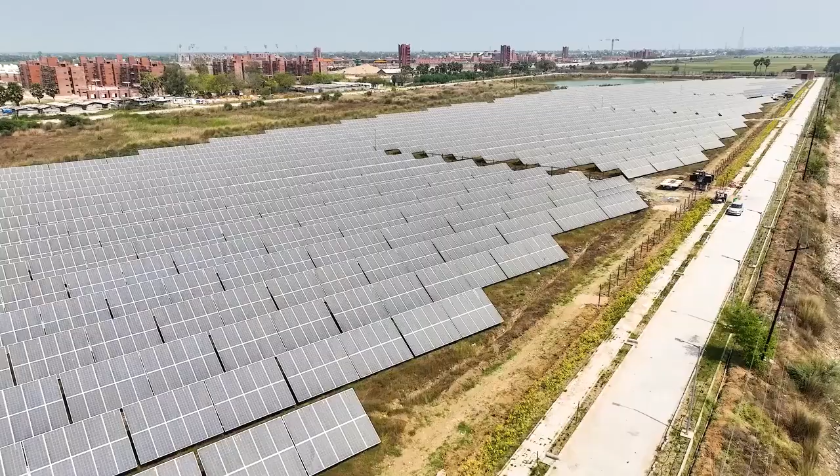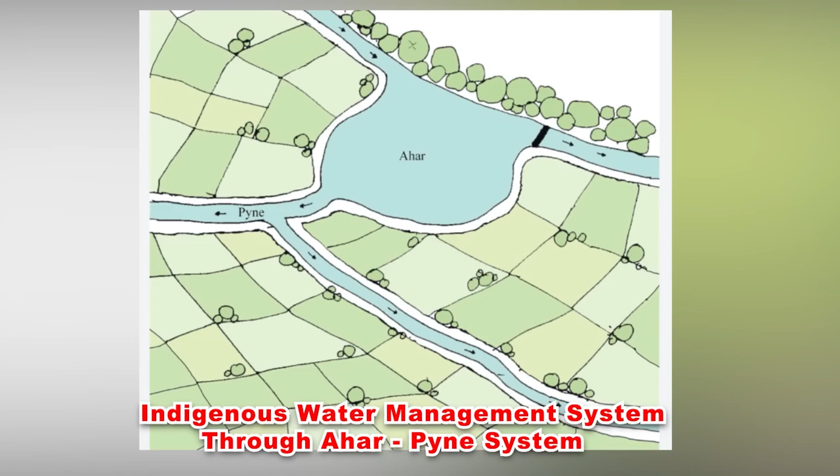The Nalanda University campus is probably the world's largest net zero sustainable green campus. The key sustainability features for developing this net zero campus include net zero energy, net zero water, net zero waste and net zero emission. This hybrid concept, featuring renewable energy sources with the indigenous approach in its integration with various innovative technologies, shall undoubtedly exemplify rational approaches to construction of other upcoming projects, campuses and community construction models in future.

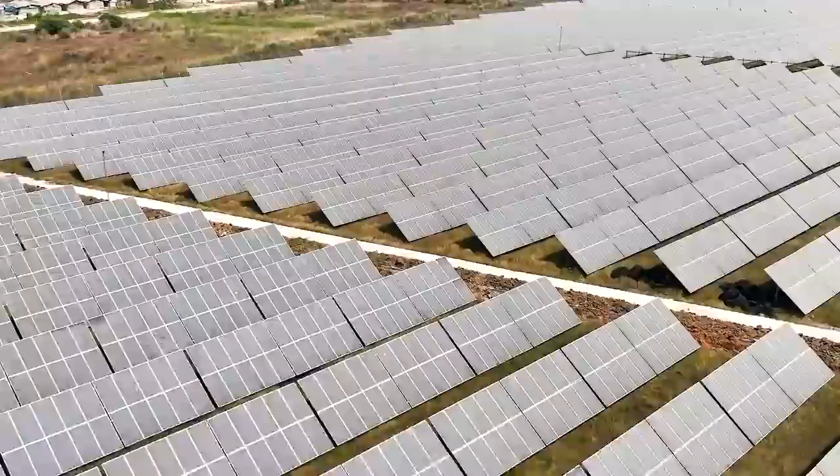The campus combines state-of-the-art technologies with planning principles of the ancient Nalanda University to create a carbon-neutral and zero-waste campus. Some of the most important and indigenous aspects and palette of concepts for passive methods operating at different scales are 6.5 MW solar PV captive power plant, 1.2 MW biogas plant, desiccant evaporative technology for cooling, heating of the buildings,

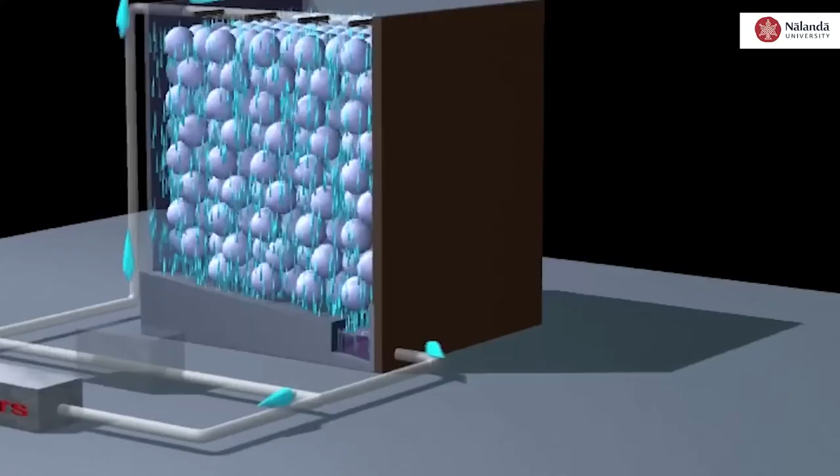solar integrated thermal storage technology for HVAC system, use of compressed stabilized earth blocks instead of common burnt clay bricks, thick cavity walls to increase thermal resistance, climate appropriate landscape design to reduce potable water demand, decentralized water treatment systems, cooling as well as cleaning of the air through use of selected native plants, building management system, etc.

The main entry gate symbolizes the university as the temple of knowledge acquisition and a seat of higher learning. The first gate along the main road is the first threshold, marking the entry to the campus. The next grand entry gate, 7.5 meters wide, forms the neck, screening people and vehicles in. The large, curved volume creates a sense of pause and calm as felt in the temple entrances.

The academic spine is spanning in the north-south direction of the campus. It houses around 40 various capacity classrooms with a total capacity of 1890 students varying from 25 to 300-seater classrooms, an examination center, international relations office, placement cell, meeting or discussion rooms of various sizes and other common facilities like faculty offices, laboratories, 100-seater mini auditorium, etc.

In the southern side of the spine, the Grand Sushma Swaraj Auditorium is situated, followed by two guest houses, namely, Campus Inn and International Center. The academic spine is grand, welcomed by a huge semicircular catenary.

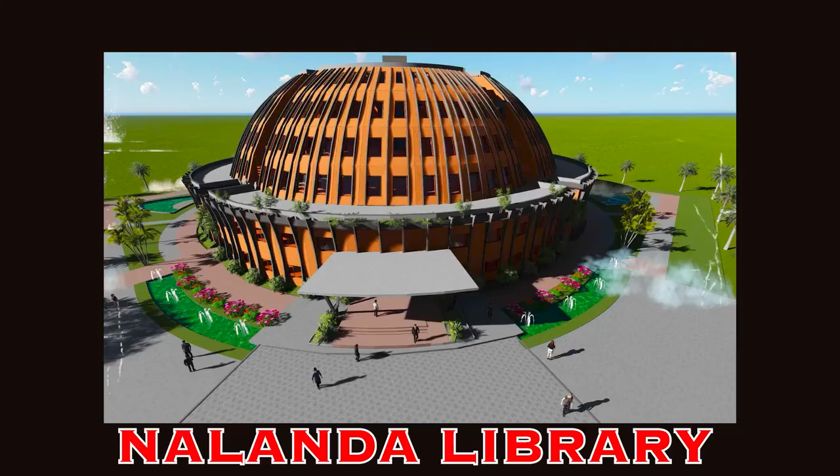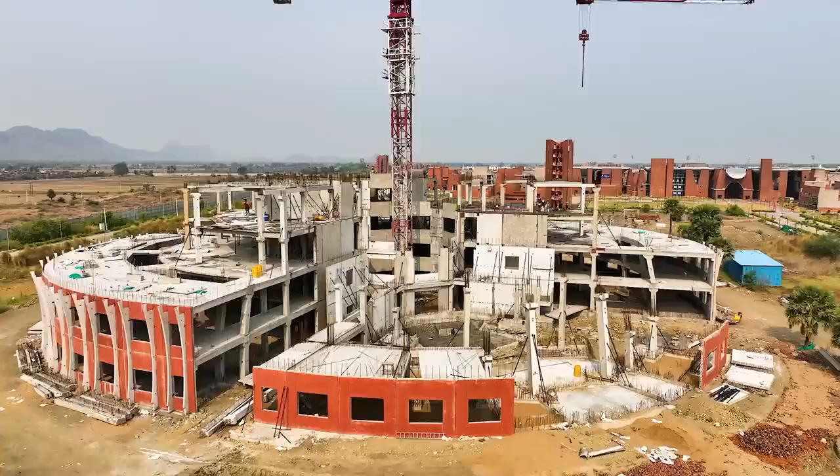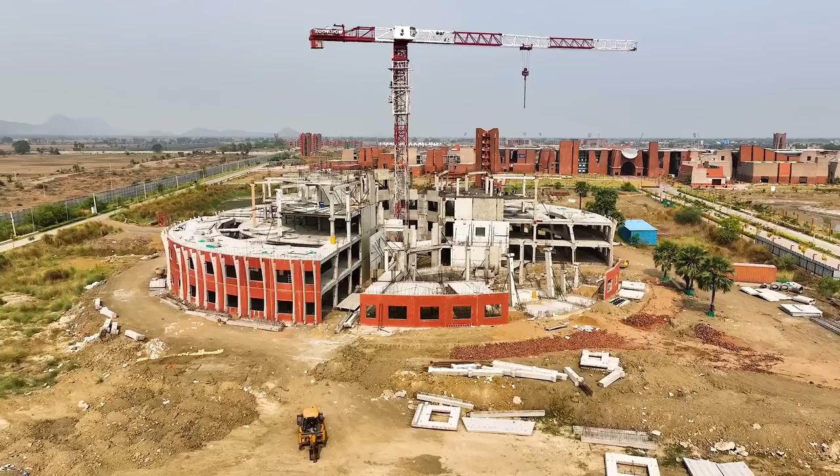The Nalanda Central Library building is envisioned to provide state-of-the-art facilities for study and multidimensional development of intellect and a locus for collaboration. The building has a built-up area of 17,545 square meters. With more than 3 lakh books volume and over 3,000 user capacity, the huge Nalanda Library building is being built in ground plus 5 floors.

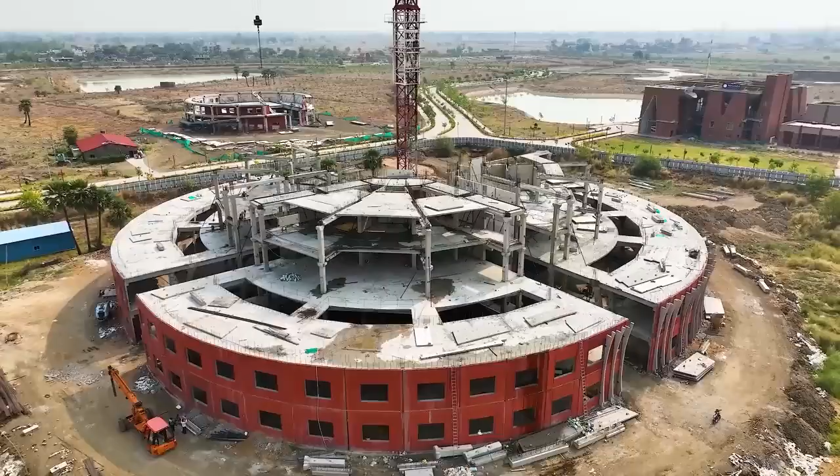The building is shaped as a spherical stupa divided in 4 quadrants with an outer radius of 81 meters at base and height of the building at crown is 26 meters, which makes it probably the biggest dome in the world. The works for construction of this building are in full swing.

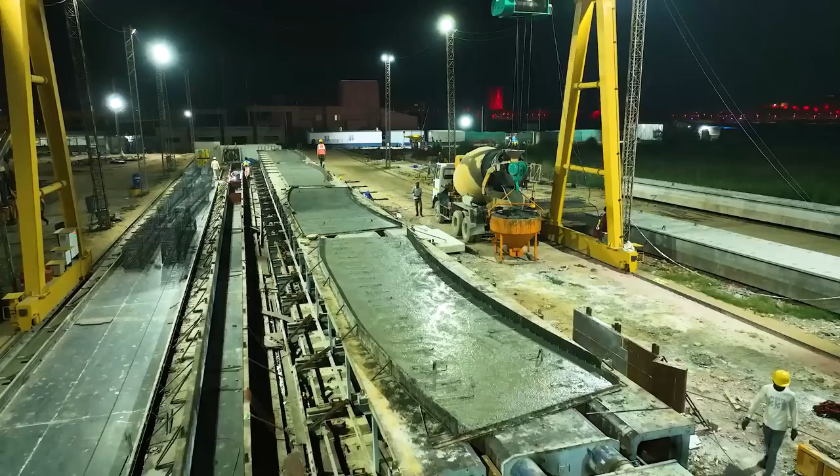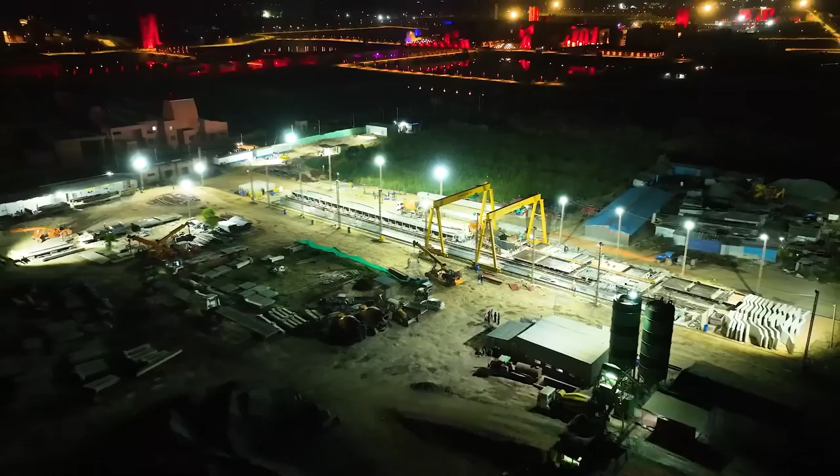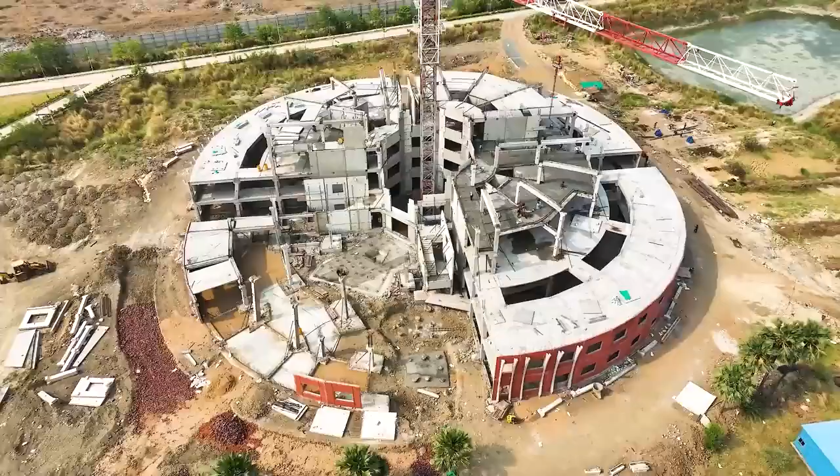In order to fast-track the progress, precast construction methodology has been adopted wherein the structural member pieces of RCC pre-stressed columns, beams, walls and slabs are cast in the casting yard, transported to the site and erected sequentially floor by floor. Over 75% of the civil works for the building is completed and the building is likely to be handed over by end of this financial year.

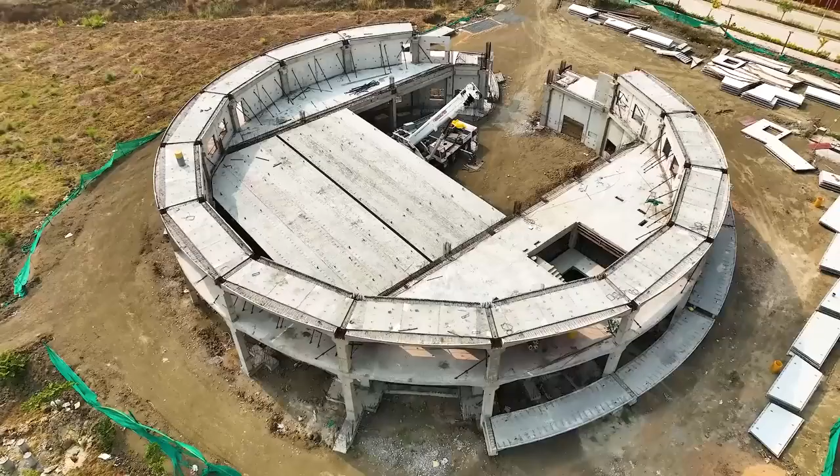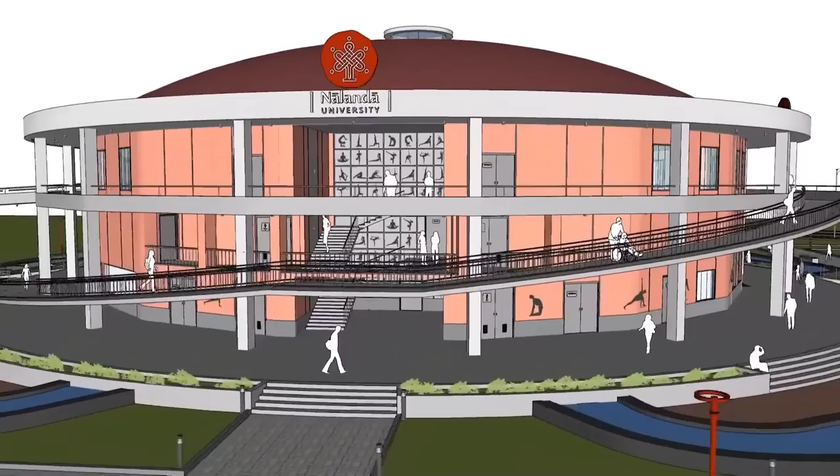The Nalanda Yoga cum Meditation Center is being built right opposite the Central Library building. Built in ground plus 1 floor, the circular building has a built-up area of 4,186 square meters. The ground floor is a 500 capacity multipurpose hall, and the first floor is the yoga hall with 266 yoga mat capacity along with ancillary facilities like green rooms, cloak rooms with lockers and toilet banks in adequate numbers in both the floors.

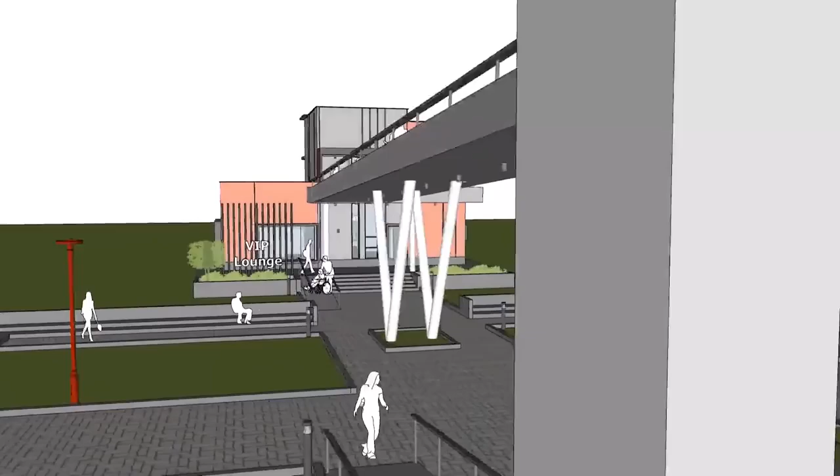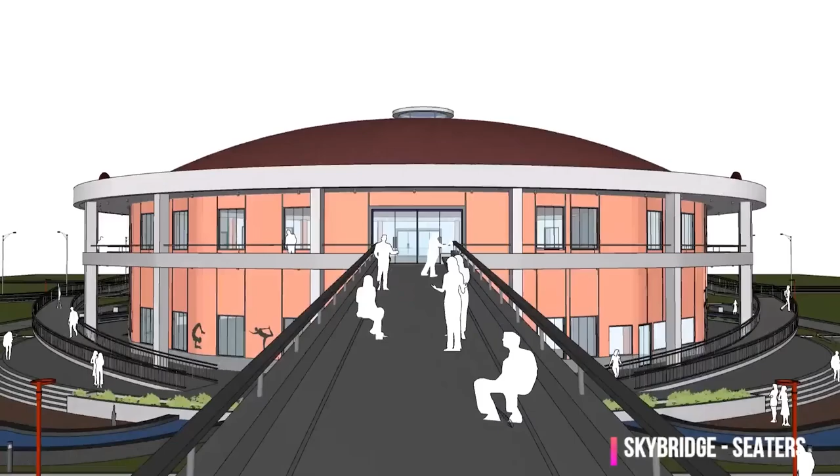For the VIP visitors, a VIP lounge facility is also there which is connected with the yoga hall through a sky bridge. Roof of the building is spherical dome shaped. The yoga center building design symbolizes the 7 meditation chakras and entire planning of the base of the building including the surrounding landscape is based on Muladhara Chakra. Roof of the building resembles the Sahasrara Chakra.

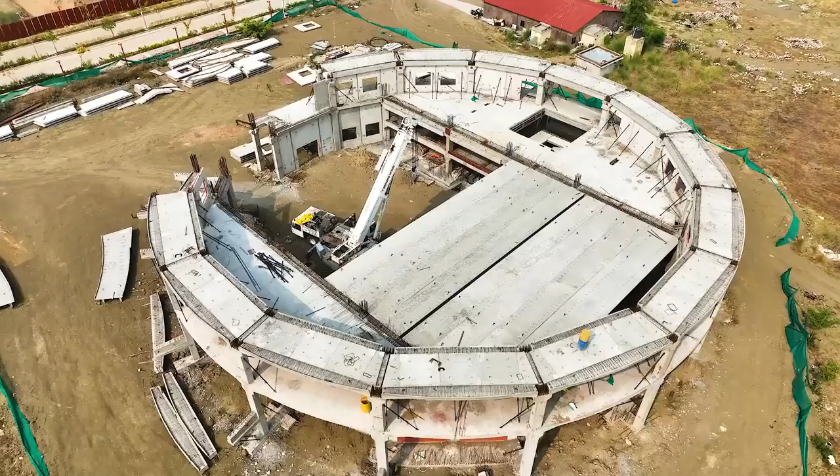The VIP block has been designed and integrated with main yoga block to give a holistic retreat experience. Works of this building are also being carried out in precast system. Erection of both the floors of the building has been completed and overall physical progress of the building is over 80%.